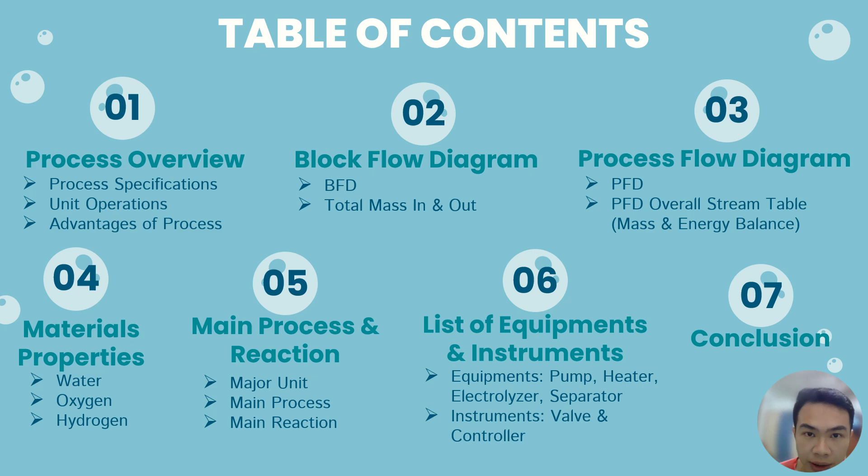Our project title is called Green Hydrogen Productions via Water Electrolysis. This is our table of contents. So first of all, let me start with the process overview of our project.

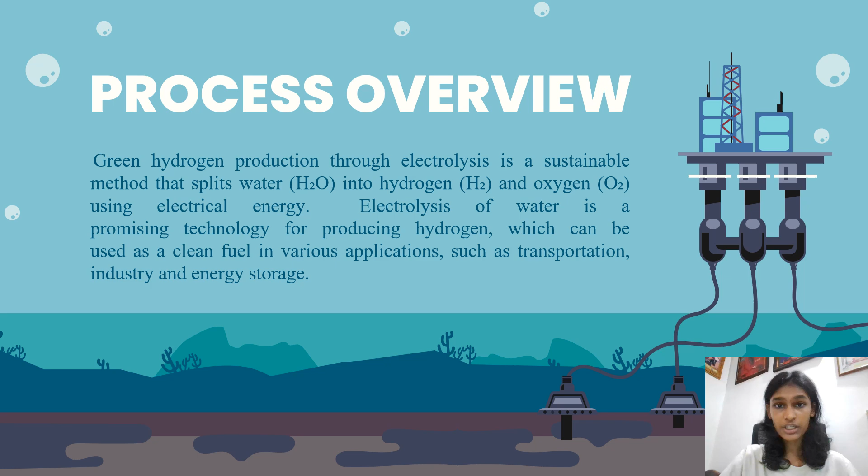Green hydrogen production through electrolysis is a sustainable method that splits water into hydrogen and oxygen using electrical energy. Electrolysis of water is a promising technology for producing hydrogen which can be used as a clean fuel in various applications such as transportation, industry and also for energy storage.

Let me just go briefly on our process specification of our project. Our main product is hydrogen and its purity would be 99.99% and our plant capacity is 100,000 tons per year. And our process, as I mentioned earlier, would be electrolysis and our scope is module which will be used in Aspen Plus simulation. The number of stacks will be 1 and the number of cells per stack will be 12.

The overall reaction is as stated here, water will be producing oxygen and also hydrogen and there will be reaction in both anode and cathode sides and our raw material is just water and its flow rate would be 92,486 kg per hour.

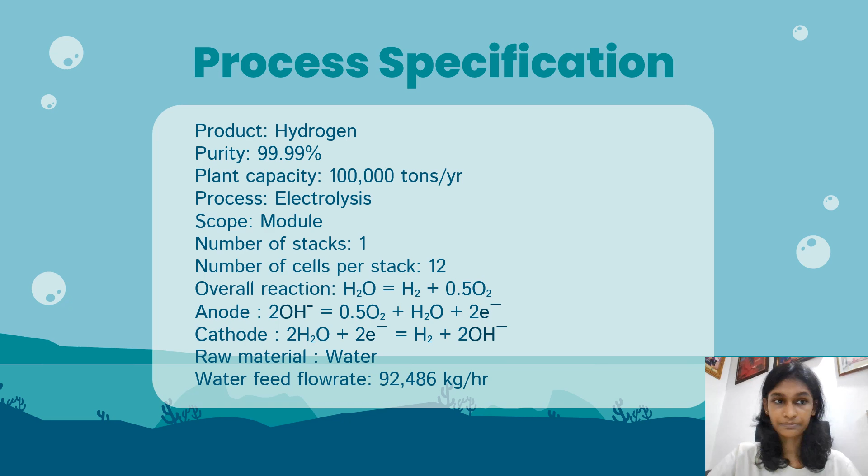Now let's discuss about the unit operation of our project. The green hydrogen production process starts with feed water being directed into a heater to increase its temperature to the optimal level for electrolysis. The heated water then enters the electrolyzer where it undergoes electrolysis by splitting water into hydrogen and oxygen gases. The electrolyzer has two main components, the anode where the oxygen gas is produced and the cathode where the hydrogen gas is produced.

The oxygen gas from the anode is directed to an anode separator to ensure its purity by removing residual water or impurities, after which the purified oxygen is stored in the O2 stack. Similarly, the hydrogen gas from the cathode is directed into a cathode separator to ensure its purity and the purified hydrogen is then stored in the H2 stack. This process efficiently produces and stores high purity hydrogen and also oxygen gases.

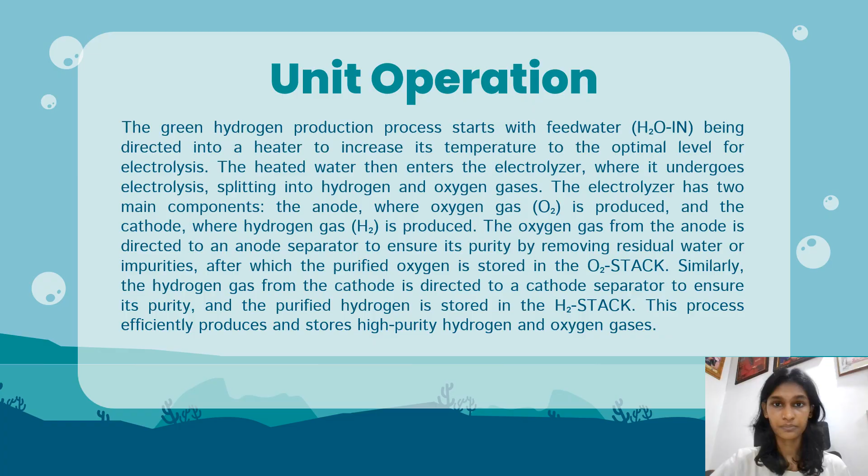The next slide will be about the advantages of the green hydrogen production process. The first one would be about sustainability and zero emissions. This process uses water as raw material and produces hydrogen and also oxygen with no greenhouse gas emissions, contributing to the goal of zero carbon emissions.

The second one would be the renewable energy integration. When powered by renewable energy sources such as solar or wind, the electrolysis process can produce green hydrogen, further decreasing the carbon footprint and promoting the use of clean energy.

The third one would be high purity of products. The process involves separators for both hydrogen and oxygen, ensuring high purity levels for both gases, which is crucial for various applications in the energy and industry sectors.

The fourth one would be about the energy storage. Hydrogen produced through this process can be stored and used as an energy carrier, providing a solution for energy storage and addressing the intermittency of renewable energy sources.

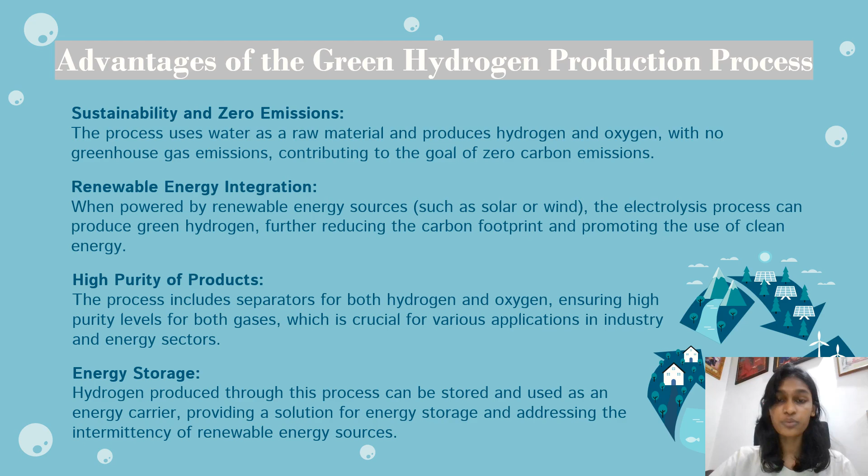Now I will briefly explain about our block flow diagram and process flow diagram regarding our green hydrogen production. This is our block flow diagram, BFD. Mainly water will be fed into the heater to heat up the water until 75 degrees Celsius for the whole process, and water is fed into the electrolyzer at 75 degrees Celsius and 7 bar.

The mass flow rate of the water fed into the heater is 92,486 kg per hour. Since only water will be fed into the process, the total mass flow rate for the inlet will be the same as the water feed flow rate, that is 92,486 kg per hour.

So after water is heated and fed into the electrolyzer, the electrolysis process occurs in the electrolyzer, splitting into oxygen gas at the anode and hydrogen at the cathode. Then the separators from both anode and cathode will separate and recycle the impurities until only pure oxygen and hydrogen gas come out.

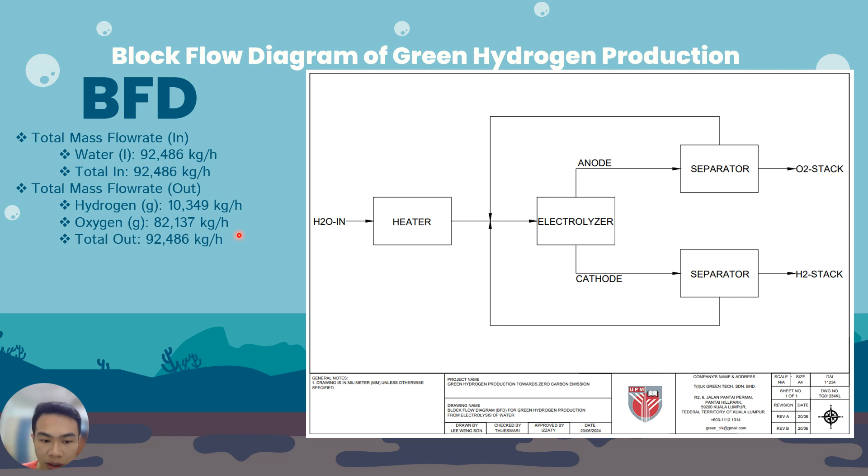The total mass flow rate of oxygen that came out from the separator from the anode was 82,137 kg per hour after we ran the Aspen Plus module, whereas the hydrogen gas that came from the cathode with the separator had a mass flow rate of 10,349 kg per hour. The total mass flow rate out was the sum of the mass flow rates of oxygen gas and hydrogen gas, and after summing, it is the same as the total mass flow rate in. So we can conclude that mass flow rate in equals mass flow rate out.

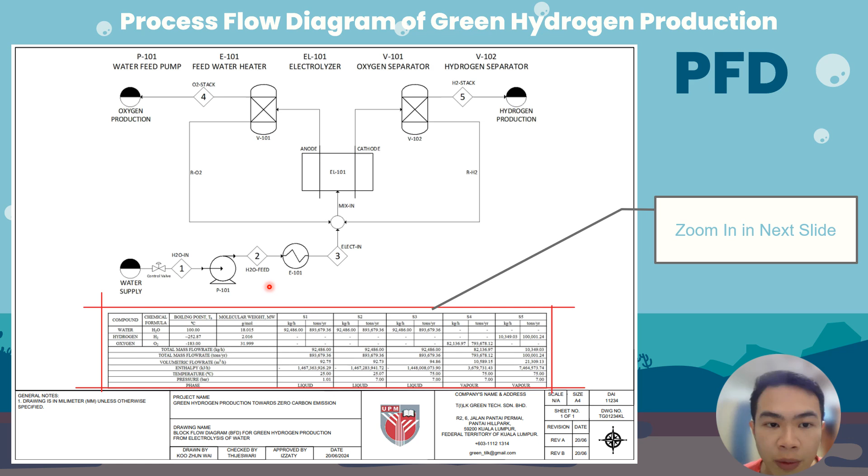This is our process flow diagram, PFD, which is different from the BFD. As you can see in the PFD, we added a control valve before the pump to control the flow rate of water, and we added the pump P101 before we feed the water into the heater to increase its pressure from 1 bar to 7 bar. The mass balance and energy balance table will be zoomed in on the next slide.

As you can see here, this is our process flow diagram table. All the streams are listed here with each component's mass flow rate and total mass flow rate, volumetric flow rate, enthalpy, temperature, pressure, and so on. You can see here the enthalpy from stream 1 until stream 3, where we feed only the water before going into the electrolyzer.

It will mainly be a negative value, which indicates an exothermic reaction because the water is still in the liquid phase. After we feed the water into the electrolyzer, the reaction becomes endothermic, and the enthalpy becomes a positive value, as you can see here, and the oxygen and hydrogen produced are in the vapor phase. So we mainly focus on hydrogen.

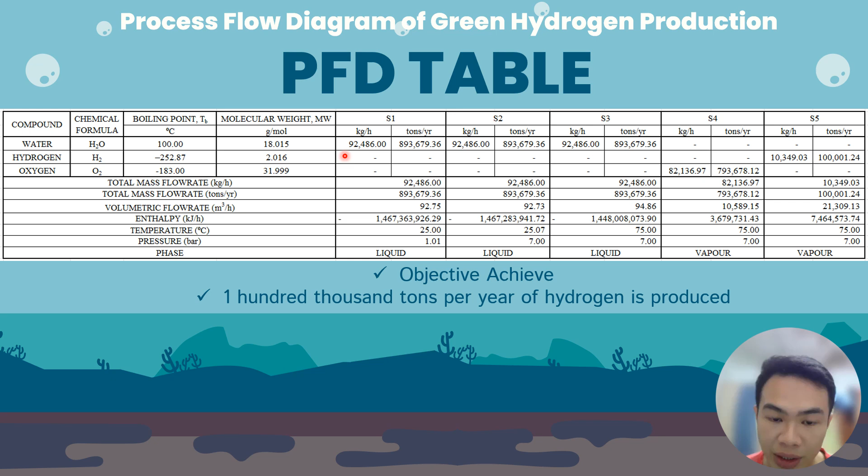For the hydrogen produced, 92,486 kilograms per hour of water will produce 100,001.24 tons per year of hydrogen gas. So the hydrogen gas produced depends on the water flow rate. Although it already exceeds the target tons per year, we can adjust the mass flow rate, like scaling up or scaling down the mass flow rate of water.

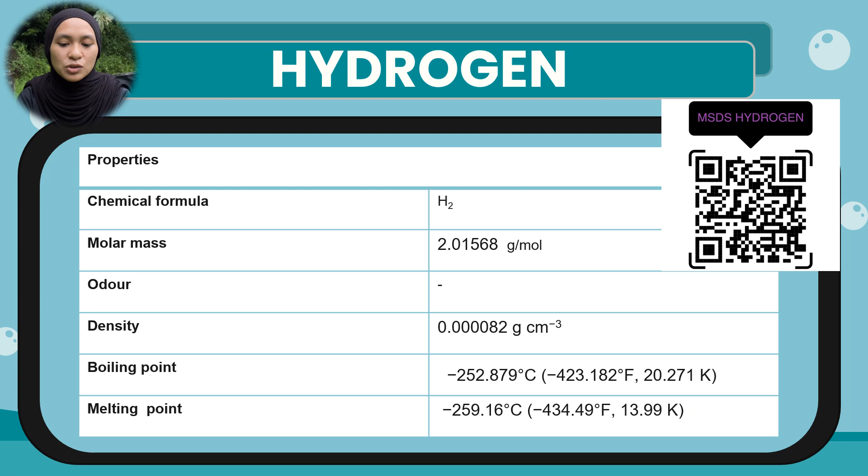Next, for hydrogen, the chemical formula is H2. The molar mass is 2.01568 gram per mole and the density is 0.000082 gram per centimeter cube. The boiling point is negative 252.87 Celsius and the melting point is negative 259.16 Celsius. The MSDS is also on the right.

Now I will be explaining the main process and reactions related to water electrolysis. The major unit in our process is called the electrolyzer. An electrolyzer, when scaled up for green hydrogen production in high yield, is a unit designed to decompose water molecules into hydrogen and oxygen gas. It consists of a pair of nickel electrodes separated by a porous diaphragm and immersed in 30 to 35% by weight potassium hydroxide solution as the liquid electrolyte.

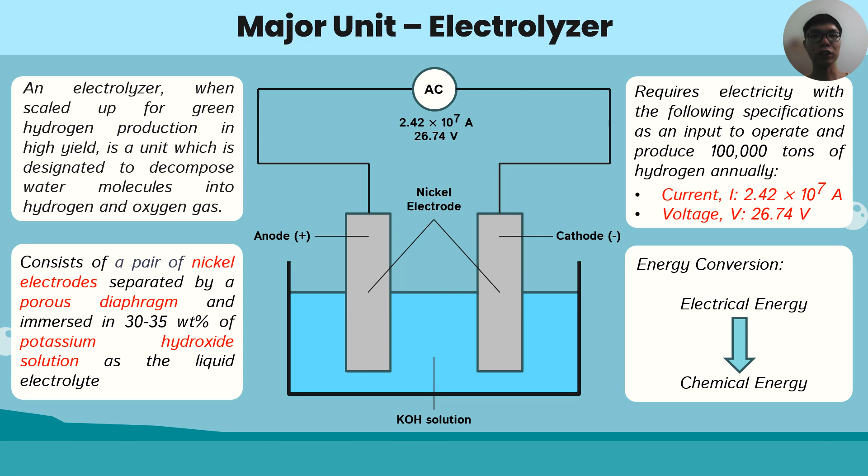The electrolyzer requires electricity with several specifications as an input to operate and produce 100,000 tons of hydrogen annually, which are a current of 2.42 times 10 to the power of 7 ampere and a voltage of 26.74 volt. In the electrolyzer, electrical energy is converted into chemical energy. Our main process is water electrolysis, which consists of three reactions.

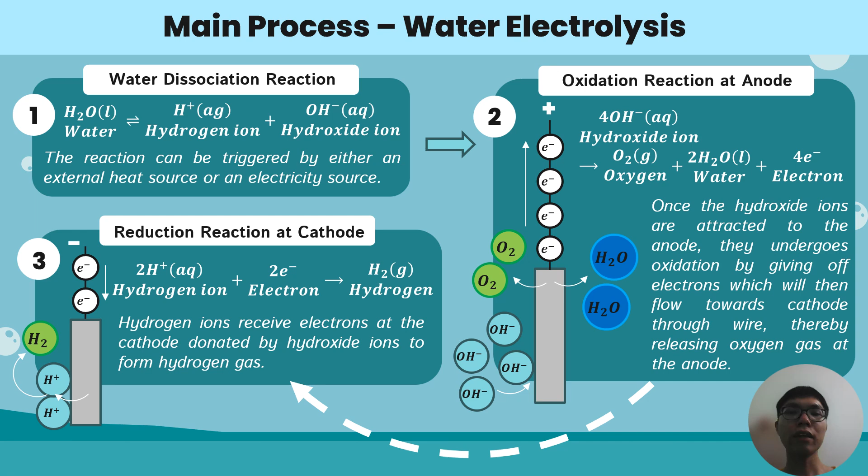The first one is water dissociation reactions. The reactions can be triggered by either an external heat source or an electricity source. This is followed by oxidation reactions at the anodes. Once the hydroxide ions are attracted to the anodes, they undergo oxidation by giving off electrons, which will then flow towards the cathode through the wire, thereby releasing oxygen gas at the anode. Lastly, hydrogen ions receive electrons at the cathode donated by hydroxide ions to form hydrogen gas.

Moving on to the main reactions known as the water decomposition reactions. By combining all the three reactions as mentioned in the previous slide, it is found that for every 2 moles of water molecule that undergoes decomposition reactions, 2 moles of hydrogen and 1 mole of oxygen will be formed.

Now I will be presenting the list of equipment and instruments that we will be using in this green hydrogen production. Firstly, we have 4 pieces of equipment used in our green hydrogen production via electrolysis process, mainly pump, heat exchanger, separators, and electrolyzer. The pump is used to pump the water supply and increase the pressure of water supply from 1 bar to 7 bar according to the journal found.

The pump efficiency would be 70% as specified in Aspen Plus according to the journal, and its electricity usage was 22.72 kilowatt calculated from Aspen. This is the visual version of the pump we use for our process flow diagram, PFD, while this is the Aspen Plus model for pump 101.

Next is the heat exchanger, which is a heater, where we heat the water supply from 25 degrees Celsius to 75 degrees Celsius with heat duty of 19,275,867.90 kilojoule per hour calculated from Aspen.

Next is the electrolyzer, which is our main and major unit where the electrolysis of water occurs. Out of the anode will come the oxygen gas, with the oxidation process, while the cathode is the place where hydrogen gas will be accumulated. All the information here is found from the journal as specified in Aspen Plus. Assume no pressure drop from anode to cathode, where the heat duty calculated from Aspen Plus is this much, which indicates a negative value and is an exothermic reaction.

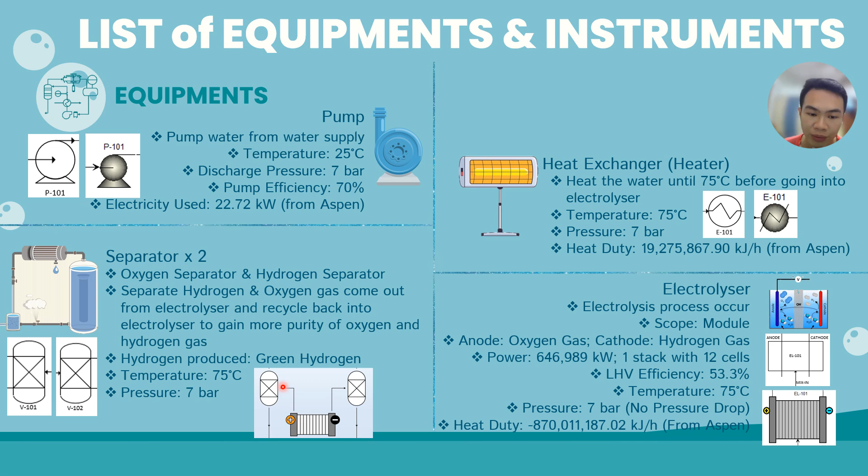During our green hydrogen production process, we have put a control valve. The instrument we have in our process flow diagram is a control valve, which controls the water flow rate before going into the pump. Although we just have this one instrument in our process flow diagram, according to ChatGPT, instruments on the other hand are used for measuring, monitoring, and controlling parameters, such as pressure gauges, thermometers, flow meters, and pH meters.

So we didn't account for the P&ID. If we had the P&ID, we might have flow meters, flow controllers for monitoring, measuring, or recording the rate of flow, and orifice or thermostat or temperature controller. A sensor for temperature allows for the ambient temperature to influence the temperature sensor's reading, ensuring accurate measurements.

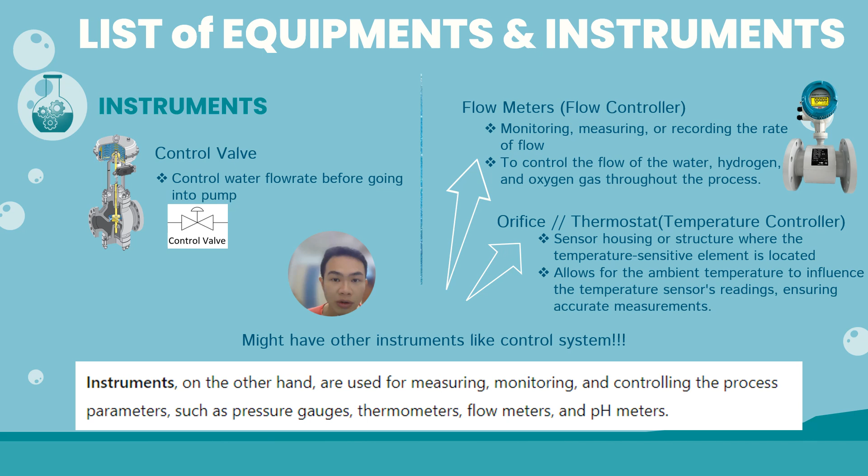In conclusion, the production of 100,000 tons of green hydrogen per year can be achieved with the implementation of an electrolysis process associated with water decomposition reactions in an electrolyzer, provided that the water is fed to the system at a rate of 92,486 kg per hour. Such a way to produce hydrogen is proven environmentally friendly as zero carbon emissions is accomplished, thereby saving our planet from pollution.